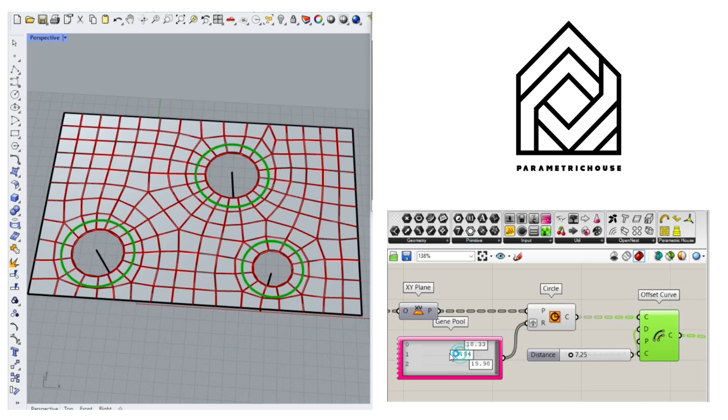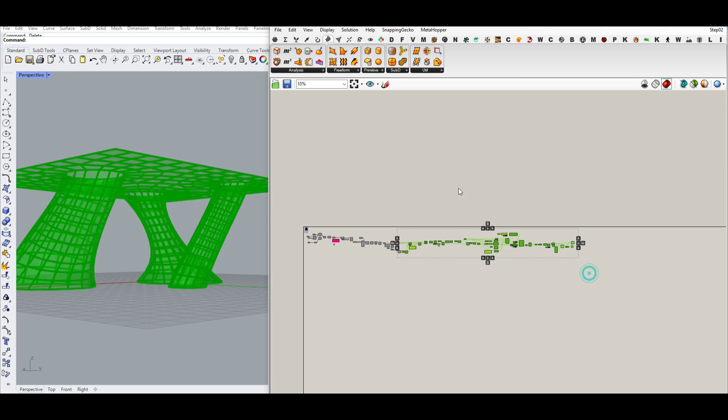In this tutorial, we want to take the parametric column, which we explained in the previous tutorial, to a next step. And that is to create a roof with a series of lines. So as you can see here, we have a series of lines as the columns and also a curve as a boundary. So we can define that.

For example, if I want to make a new one, I can say, okay, I want a circle. I can bring this up and draw a series of lines inside. So for example, if I just bring these lines up and make a copy, we can give them to the columns, set multiple curves, and it's going to run.

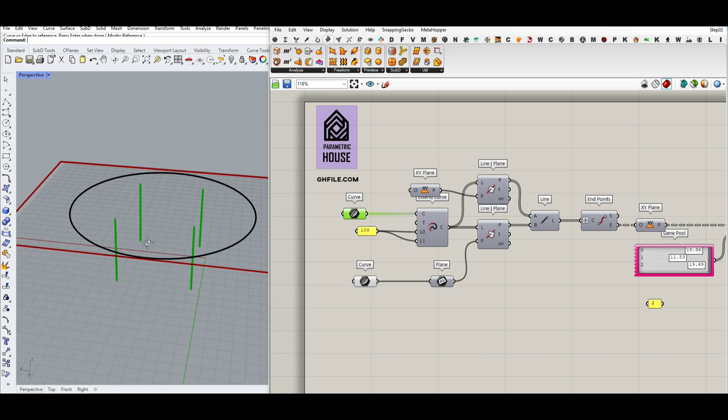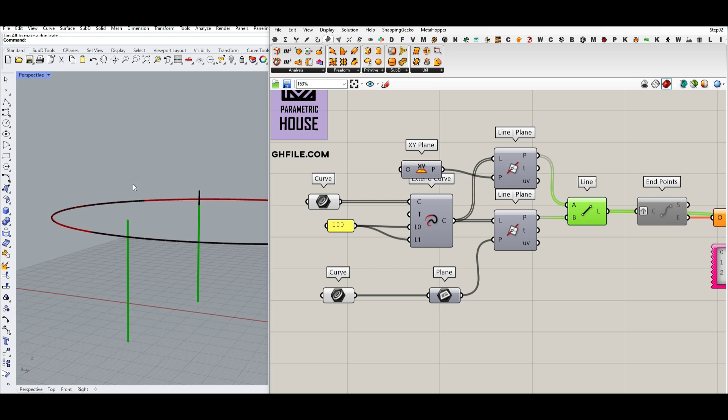The most important thing about this algorithm is that it's going to fix the lines. So let me explain this. If I disable that, we can see that we can fix that with a simple algorithm. So if these lines are outside the boundary, if I bring this up, it's going to only select the part which is connected to the roof. And if I bring it down, it's going to automatically project it up. So we have used this technique, and the rest is going to produce the holes and the columns.

So as you can see here, I can define the circle's radius by just changing these numbers. And also, as you can see here, we have an offset, which is going to define the controlling of the mesh. As you can see here, when we quad remesh it, these circles are going to affect the final results, and that is going to be the base mesh for the columns.

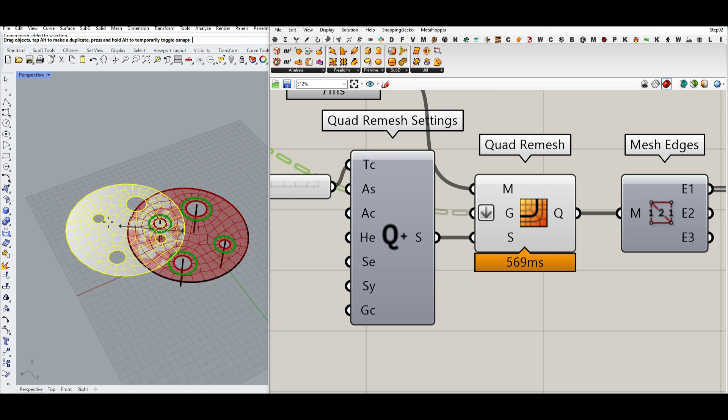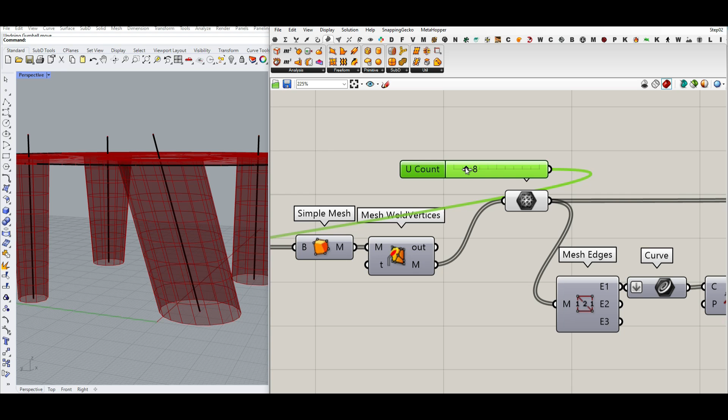We have also a scaling mechanism and technique here, which we can scale the columns at the bottom, which I'm going to explain. And as you can see here, if I change the location of the line, for example, I want to change that, create a new result. So as you can see here, we can change that. We can also control how many divisions we will have on the columns, as you can see here. And finally it gets a base mesh, which is going to be used in the algorithm.

So these are going to be the columns. After that, we're going to use the same algorithm to create the final results for the columns and join all of them together with a single mesh, which is going to be this one.

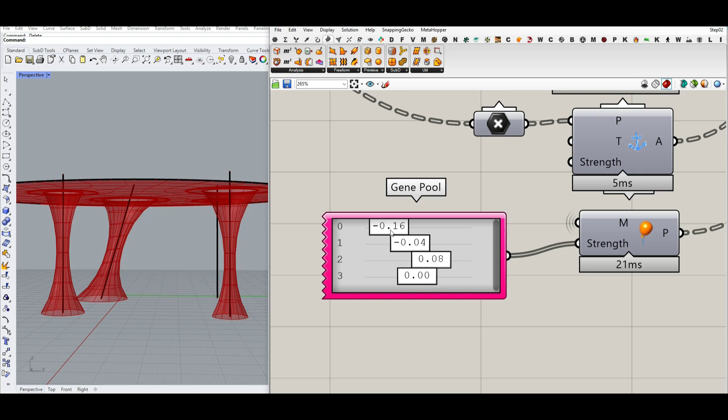Before that, I can also inflate the columns differently. So in the previous tutorial, it was a single column. But as you can see here, we can control each column separately to create different results. And also the tensile, and also the gravity, which is going to affect the final results. Finally, we can remesh the output, and that is going to give us a cleaner mesh, which is going to be the final goal in this tutorial.

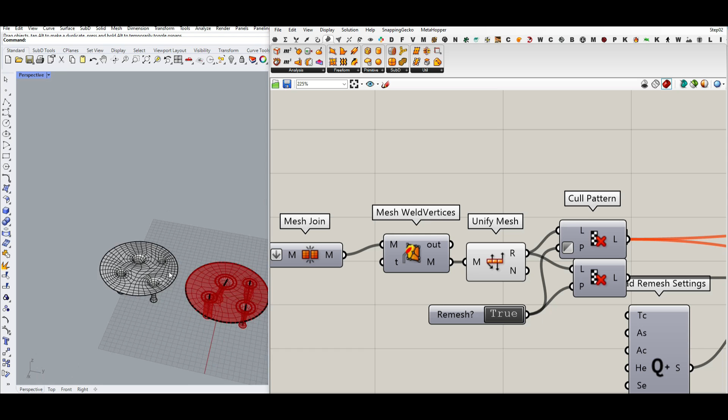So what we're going to learn is how to define columns with a series of lines, a curve as a boundary, which is going to give us more control over the shape. And finally, we can have the mesh of the columns connected to the roof to get the final results. Okay, let me turn off the algorithm and explain how this can be achieved using this algorithm.